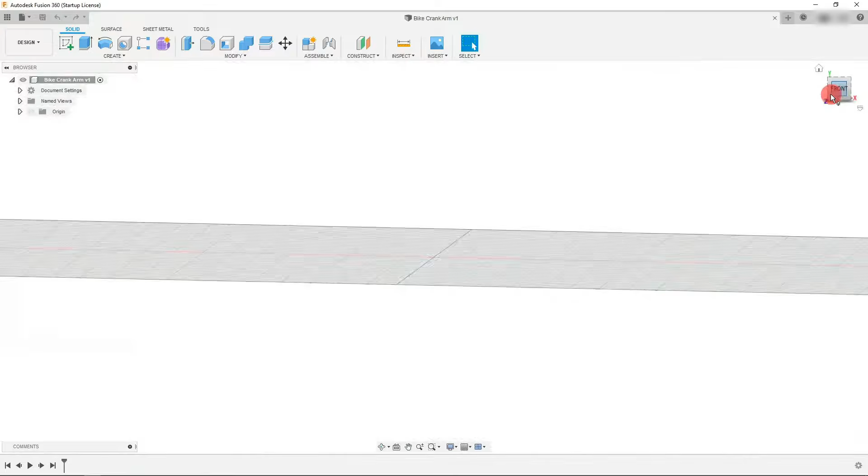Hi, in this tutorial we're going to create a crank arm for a bicycle in Autodesk Fusion 360. So let's get started. The first thing we want to do is come over here to our view cube and click on front. We're now looking at the front of our part. Now let's come over to where it says origin here, and we're going to click on this arrow to reveal our three planes. Now we want to select the XY plane because that lines up with our front view here.

So I'm going to come over here and I'm going to click on Create Sketch. And at this point, let's come down to this drop-down menu, Create Rectangle, and click on Center Rectangle. And from here, I'm going to click on the origin, and I'm going to drag out, and I'm going to place this rectangle here. Now I'm going to right-click and hit OK.

But before we go any further, I want to change my document settings to be millimeters. So I'm going to come over here to document settings and click on this arrow. And where it says units, inches, click on change active units. It's this little button here. And we're going to change this to millimeter.

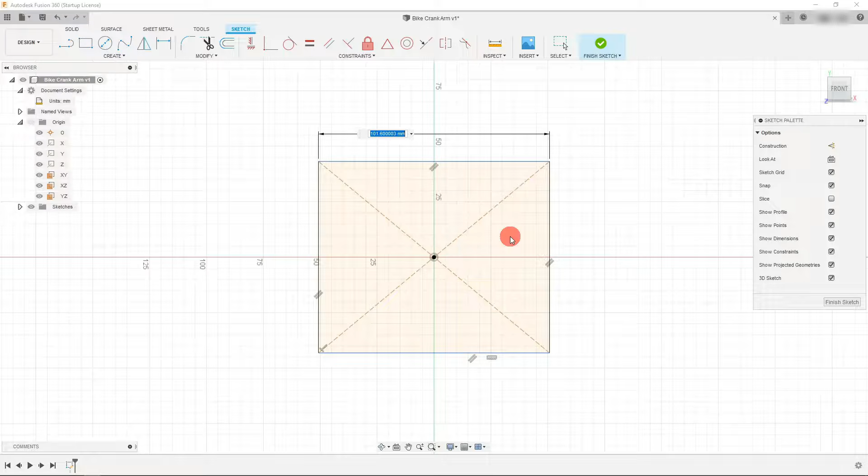And just hit OK. And from here, we can come over here to where it says sketch dimension on this menu. And we're going to set this dimension to be 37 millimeters and hit enter. And we're going to set a dimension on the other leg to be 19 millimeters. And that's our first profile. So after that's been created, you can hit finish sketch.

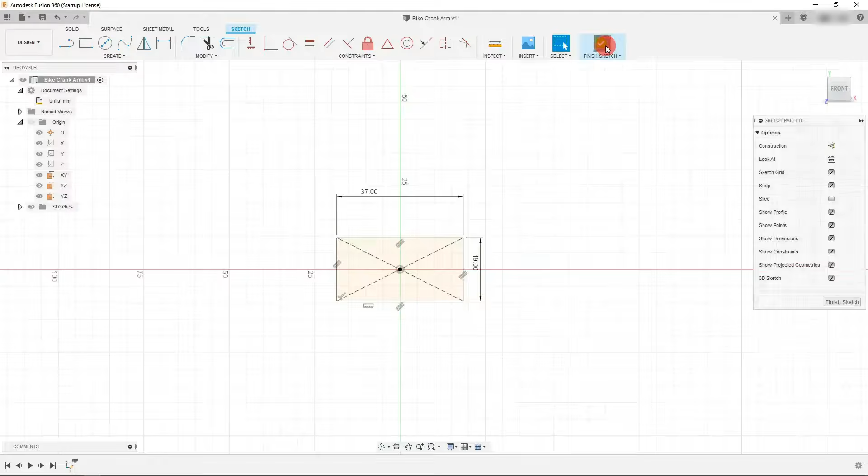And with this being made, let's come over here and click on the corner here. With this being made, we want to create another plane that we can use. So let's click on XY again. This was the plane that we used to make this sketch. I'm going to come over here to construct, click on the drop down, and click on offset plane. And there's this little arrow. Now you can drag this back and forth, or you can just type in a value.

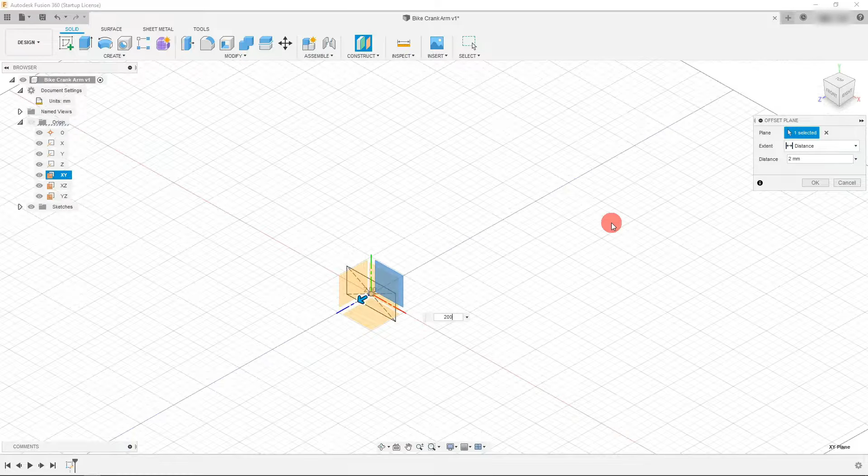So I want my distance to be, let's say, 200, so 200 millimeters. And now if we want to flip the direction, I'm just going to put a negative in front of the 200. You can do that either here in this little window or you can do it in this box, but we're going to hit OK. And we now have a plane which is offset from our original plane.

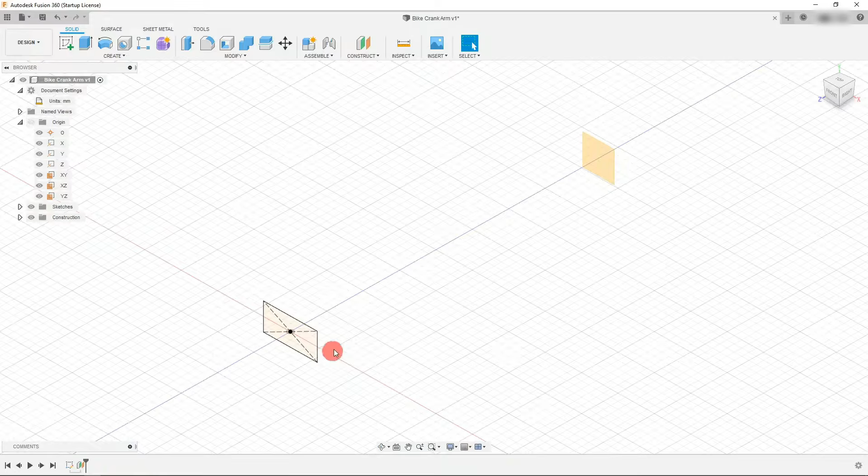And you can create a sketch on a plane. So what we want to do is we want to click on this plane, and we're going to come over here and click on Create Sketch. And like we did before, let's come up to the Create command, and we're going to come down to Rectangle and Center Rectangle. And we're going to place this on this green line here. This is lined up with the origin and with the center point of our original rectangle.

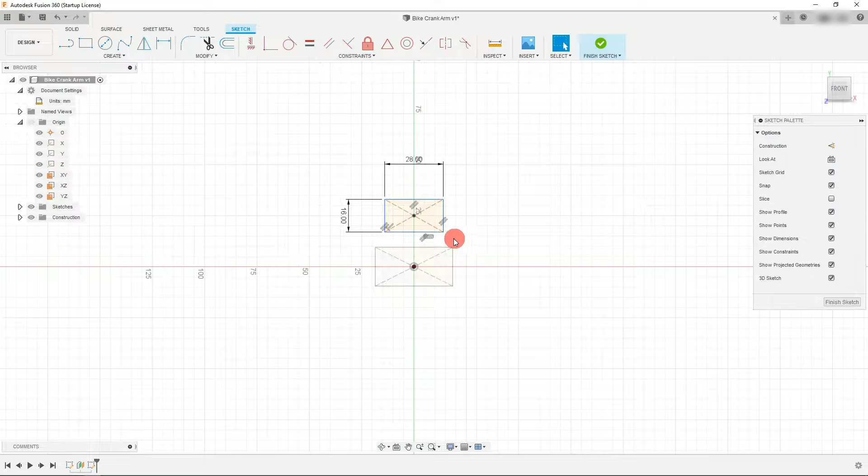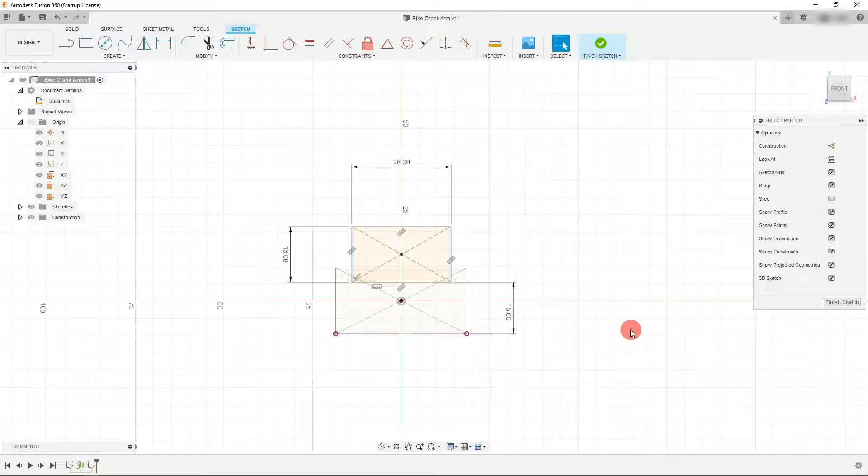So I'm just going to place this at around here, and I'm going to set this dimension to be 28 millimeters. And if you hit tab on your keyboard, it'll automatically go to the next leg. Make that 16 millimeters. And that's what we want. So we want to set a dimension that is 15 millimeters from this bottom leg to this leg here. So make this 15 millimeters. And that's what we want.

And we want to lock the location of this rectangle in place. So you can click on the center of this rectangle and click on the center of this rectangle. And if you click on this constraint right here, that's going to permanently lock them in place so they cannot move. And so from here, we can finish our sketch. And I can come down and click on Orbit here, and I can rotate this around a little bit, and we could get a better look at what we've created. So this is what we want.

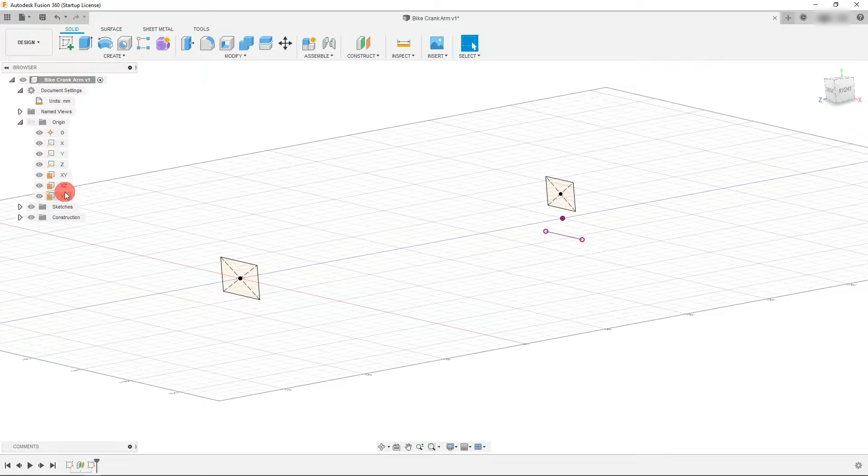And from here, what we want to do is we want to create another sketch. So we're going to start this sketch actually on the YZ plane. And the YZ plane cuts through these rectangles in the other direction. So let's create a sketch.

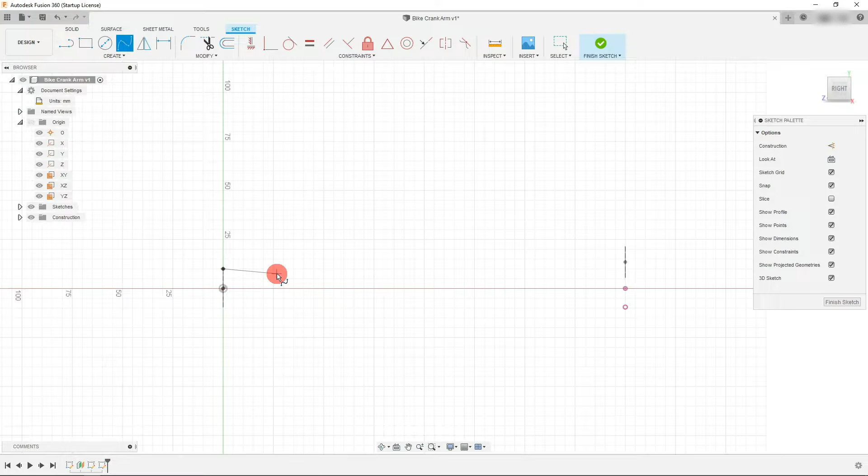And we're going to create a spline. So come over here and click on Fit Point Spline, and we're going to click on the top of the first rectangle, and we're just going to try to feel out the profile that we want. We can always change it later if necessary.

And we're going to place that here and right click OK. And from here we're going to click on line, and we're going to create a line. Oh, you see, actually this isn't correct. This needs to be dragged up to the top.

So if you hover over the top of your rectangle and you click on the point on your spline, you can click on coincident here up in the constraints, and that will constrain them accordingly. Be sure that's right. I'm zooming in and I'm seeing that it didn't do what I wanted to, so just be sure of that. Click on this point, hold down shift, click on this point, and click on coincident to make them coincident.

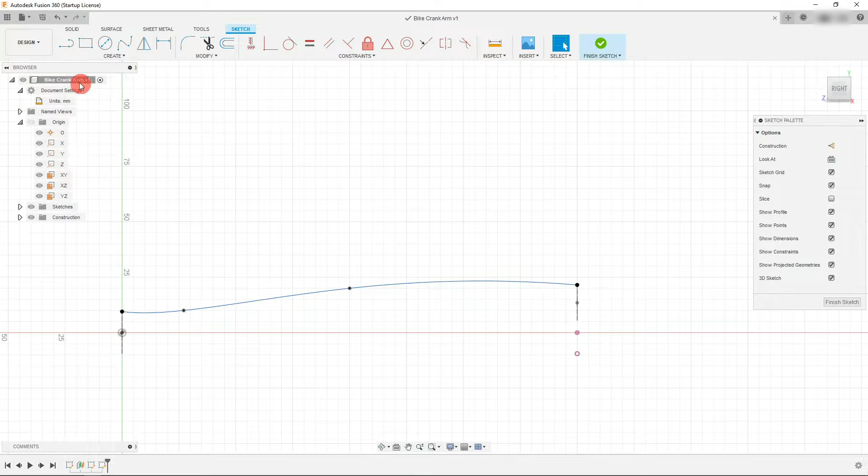And so with that created, I'm just going to save this, and I'm going to click on line, and I'm going to start a line on this point, and I'm going to drag out, and I'm going to create another line on the other point, and I'm going to drag out.

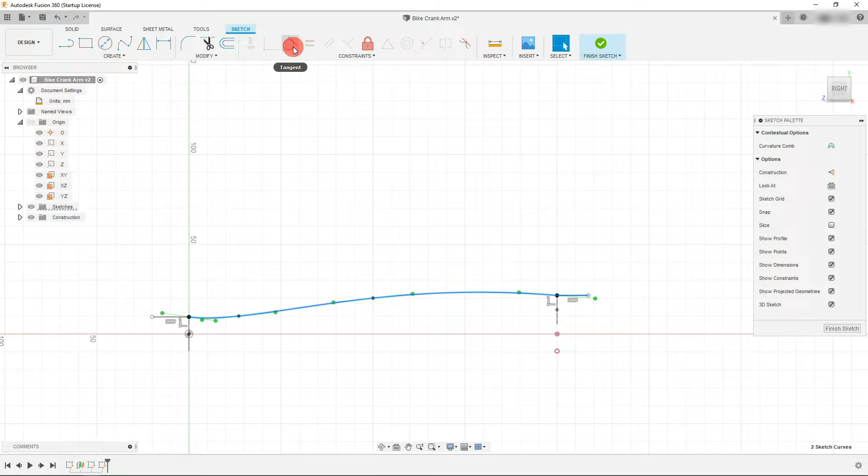And from here, I'm going to click on the spline that we created, and I'm going to hold down shift and click on this line as well. And I'm going to click on this constraint, it's called tangent. When you click on it, it's going to make these lines tangent to each other. So let's do that with this set as well. And there we go, we now have a spline that's tangent to both these lines.

Okay, great, so let's finish our sketch. And now we have our sketch created, which is great. So from here, we want to create a loft. So we're going to come to create, and under create, which will automatically be up - this is the solid tab right here that we're in - so come down to create, and let's come down to our loft.

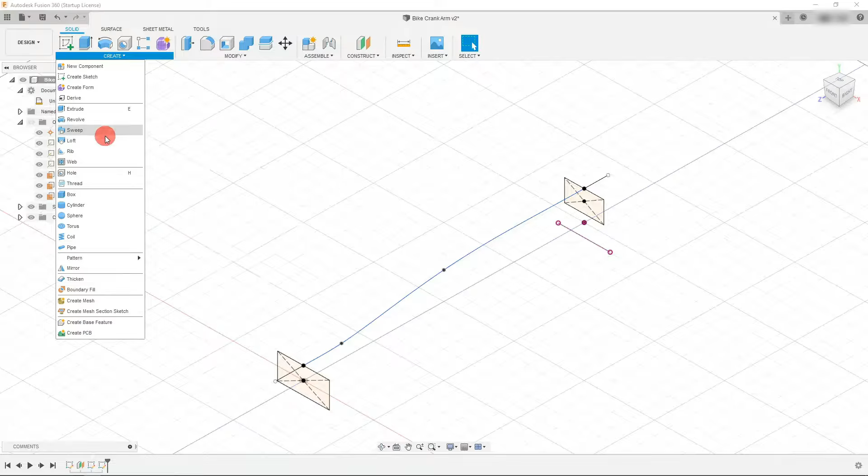So this window is going to pop up on the right side. What you want to do is you want to click on the first rectangle that we made, and then you want to click on the second one, and that's going to draw a profile between them, a sort of solid between them, I should say.

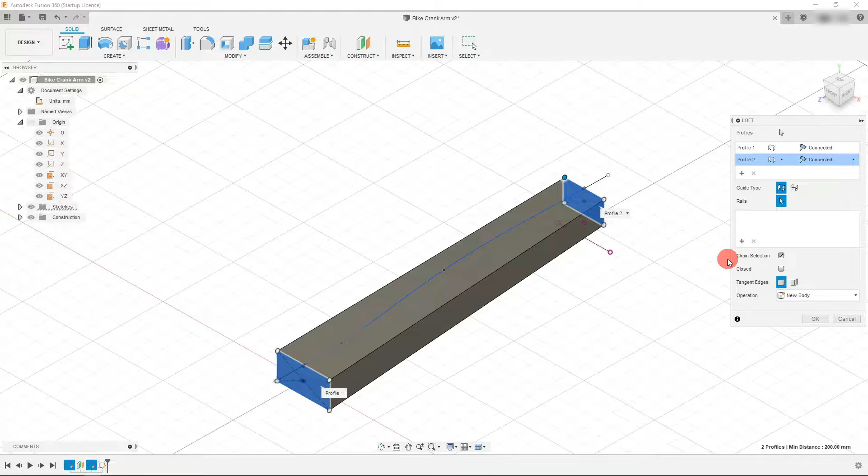And we're going to click on this little cursor right here where it says rails, so click on that. And when you have that selected, click on this profile that we created, the spline that we created. You click on it, and you're going to see that our original profile is now kind of bent to this spline along the path of the spline. So that's what we want.

We're going to hit OK, and we're just going to take a second to inspect what we've created. So that's our shape so far.

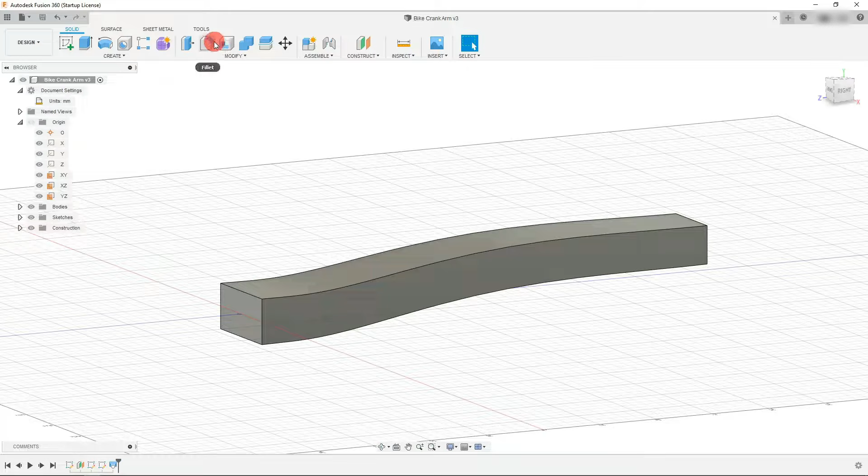With our shape created, we want to add a couple fillets to round out these ends. So let's come up to fillet, and we're going to select this edge and this edge, and we're going to type in 18.1, so 18.1 millimeters, and we're going to hit enter.

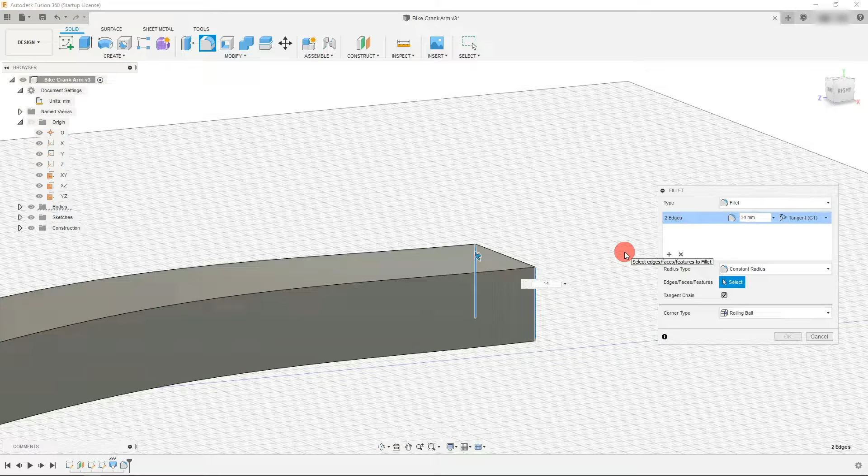And we're going to do the same thing on the other side here. So come up to fillet, and we're going to click on this edge, and we want to make that 14, and we're going to hit OK. And now we've rounded out the ends of our part.

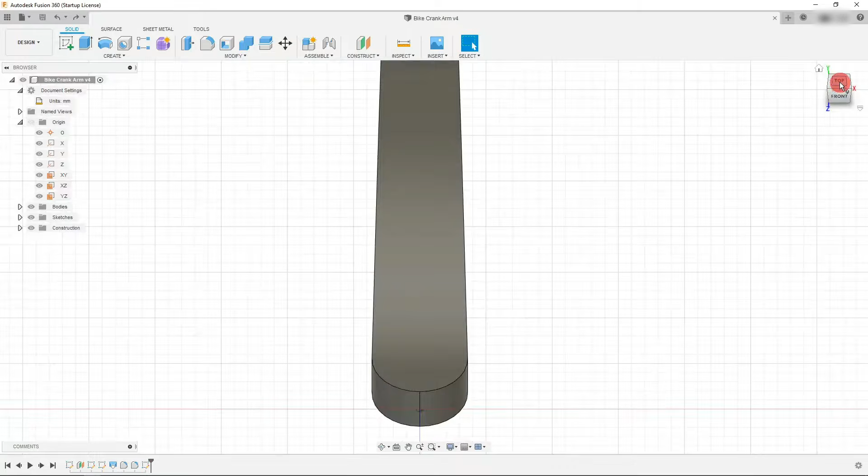And so we now have part of our shape complete. From here, let's come over to our view cube, and we're going to select this edge and then the top to look at the top of our part. And from here, we're going to come over to our planes on the left side, and if we hover over XZ, you're going to see the XZ plane come up.

So we're going to start a sketch on this plane, so come over and click on Create Sketch. And once we've created our sketch, we need to come down to Create, the Create drop down right here, and we're going to come down to where it says Project/Include, and click on Project.

Once you have that selected, what we want to do is select this point right here - it's between the arc and the other arc, so click on that. And we also want to click on this point, and let's select the other two as well. And with those 4 points selected, we're just going to hit OK.

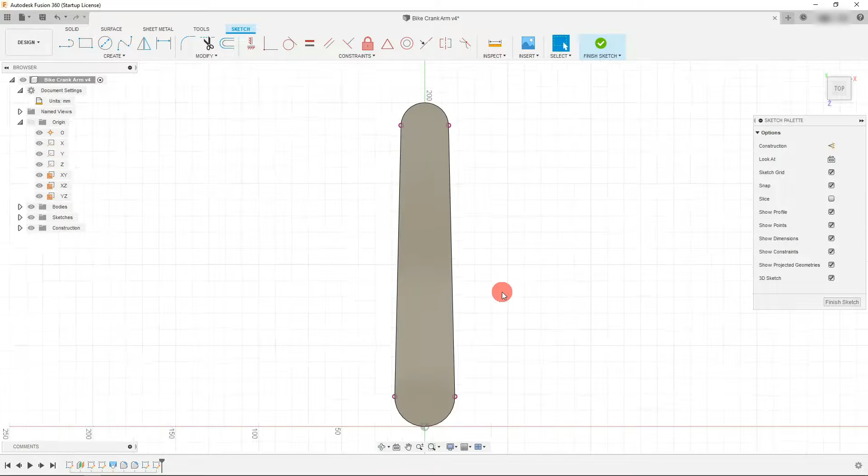And now we have those points selected. So what we can do from here is we can come to Create, and we're going to come down to Arc, and we're going to select the 3-point arc.

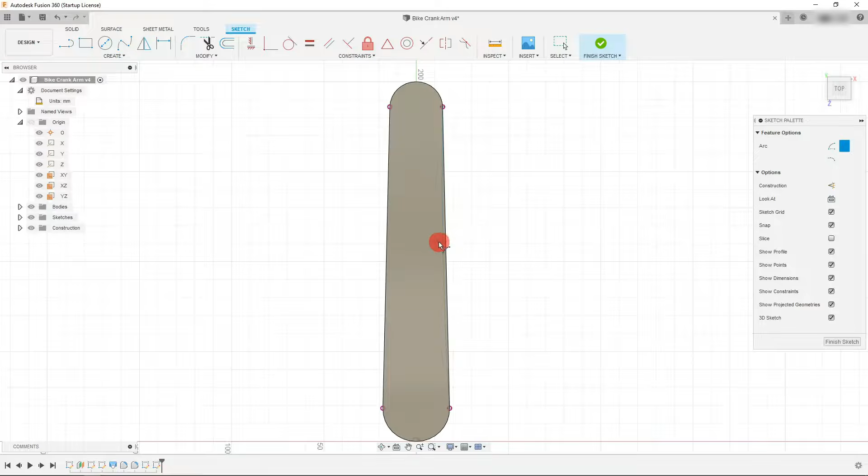And we're going to click on this point and then this point, and you're going to see that we can create an arc pretty much at any angle that we choose. So I'm going to bring it in to about here, and I'm going to click down, and I want to do the same thing on the other side.

And I want to set a dimension, so I'm going to click Sketch Dimension, and I'm going to click on the arc, and a large number is going to come up because this is a large radius of a large circle. So we're just going to hit Enter.

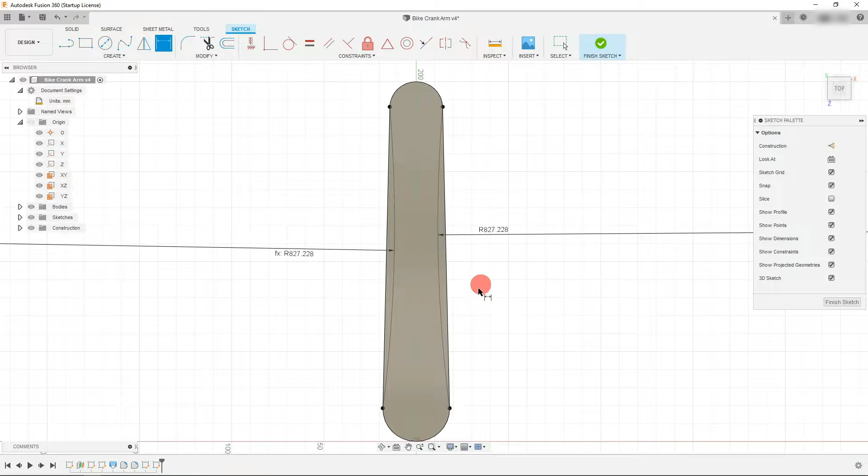And if we click on the other side, once you see that it comes up in blue, just click on the first one, and that's going to link the 2 dimensions, and just hit Enter. And so now these 2 arcs are equal to each other because they're the same dimension.

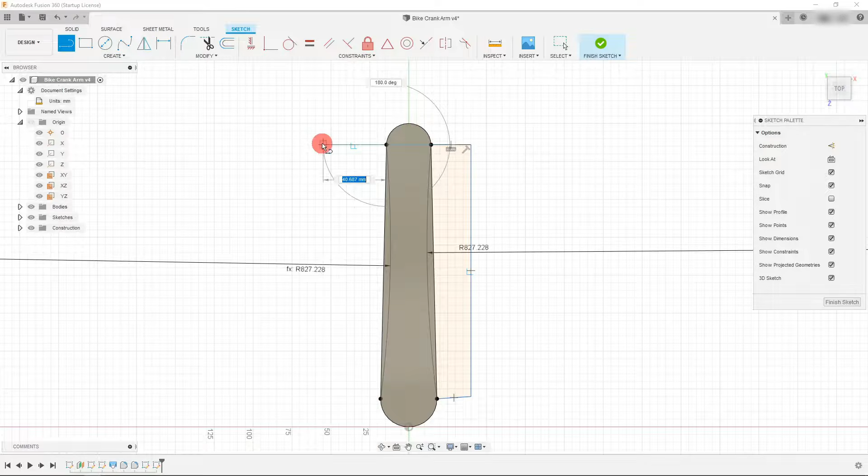And what we want to do is let's come to Line, and let's create a sketch. Now this doesn't need to be dimensioned. I'm just creating a box that closes the profile. So you can come and just create a box to close up this profile.

And with our sketch created, let's come up to Finish Sketch. And now with our sketch finished, let's come over to Extrude.

And we're going to select this profile and this profile. And if I rotate my part a little bit, it's going to make it a little easier to see what we're doing here. So under Operation, let's change this to Cut because we're creating a cut.

And if I take this arrow and drag it upward, you're going to see it's going to cut through our part. But we don't want to just cut in one direction, we want to cut in 2 directions. So let's come to Direction and let's select Symmetric.

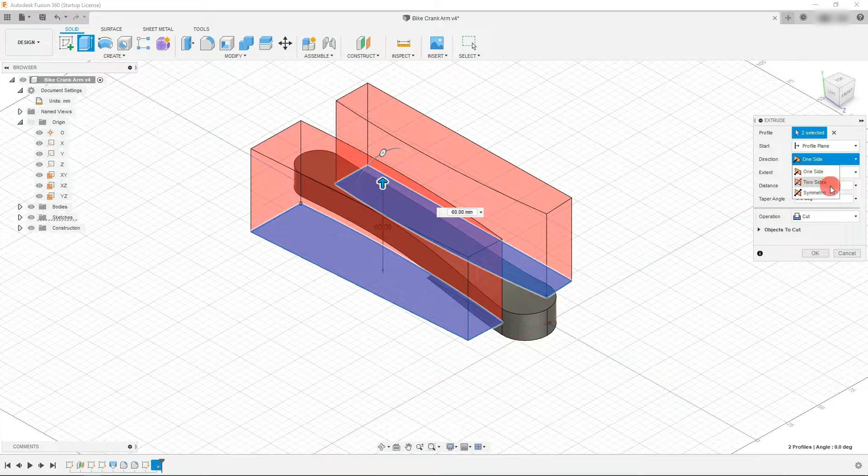Now we're cutting symmetrically the same distance through 2 different directions. So we're going to hit OK.

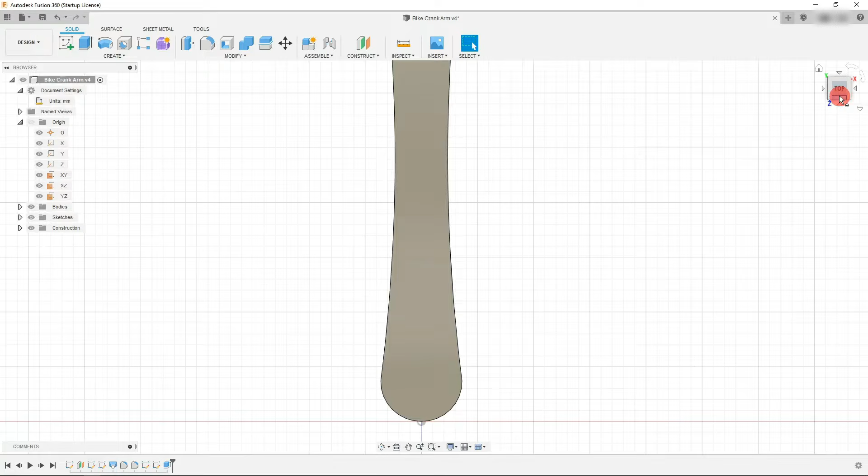And if I look at this from the top now, you're going to see that the cut we've made has changed the top profile. And that's what we want.

So from here, we want to create an extrusion. So we want to create an extrusion here on the bottom. And the way to do that is we're going to come to our plane, here, our XZ plane.

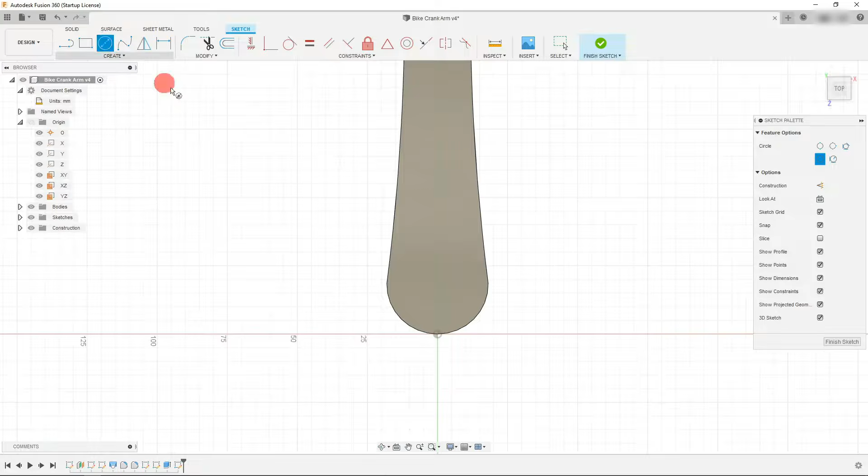And if I start a sketch here on the XZ plane, then I can come and create a center diameter circle, and I can place it where I'd like it to be. Now, it's going to be helpful for me to select this arc.

And with the arc selected, I can come over to Create, and I can come down to Project, and I can project that arc. And with that arc projected, it's going to be a little bit easier for me to find where my center of my circle is. So let me just place my circle kind of randomly for now.

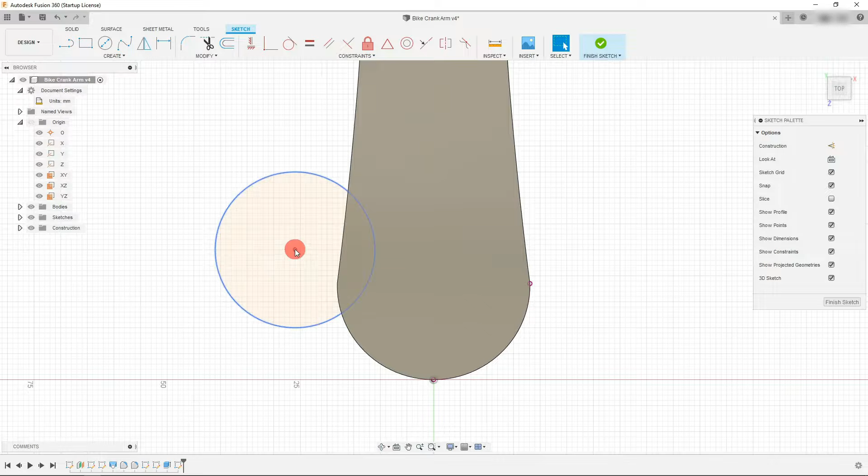And I'm going to try to drag it into place. Now, to help me a little bit more, I can come up to Line and create a line from this point that comes out, and another line that comes to this point here.

And now with these 2 lines, I can determine the center of my circle. So I'm going to click on these 2 lines, select them both, and click on Construction here on the right to make them construction lines. And I can select this point and put them on top of each other with a coincident constraint.

And now I can make my circle whatever size I'd like it to be. So I'm going to make it about this size. So we're just going to set a dimension here, pretty loose. We're going to set it to be about 34.9 millimeters.

And with that created, we're going to finish our sketch. And if we look at this from our view here, we can hit extrude, and if we drag down and change the operation to join, we can create an extrusion that's going to join to the original extrusion.

And we want this to come down about, let's say, 20 millimeters. Now we can always change it, but for now we're just going to leave it at that dimension.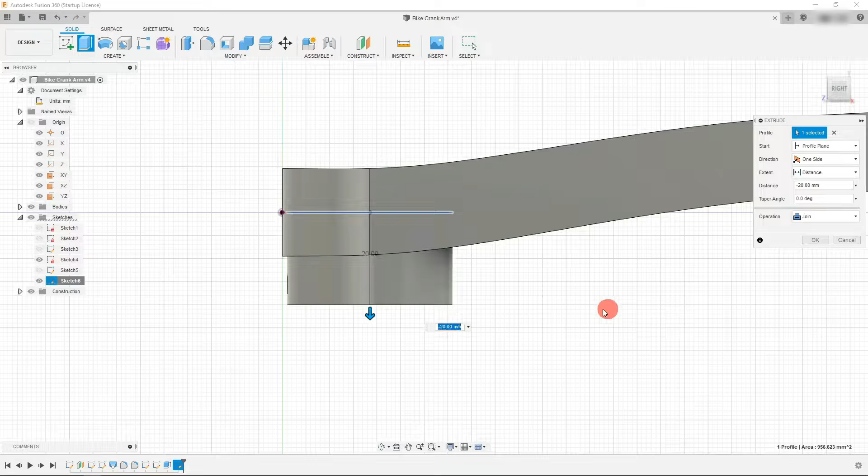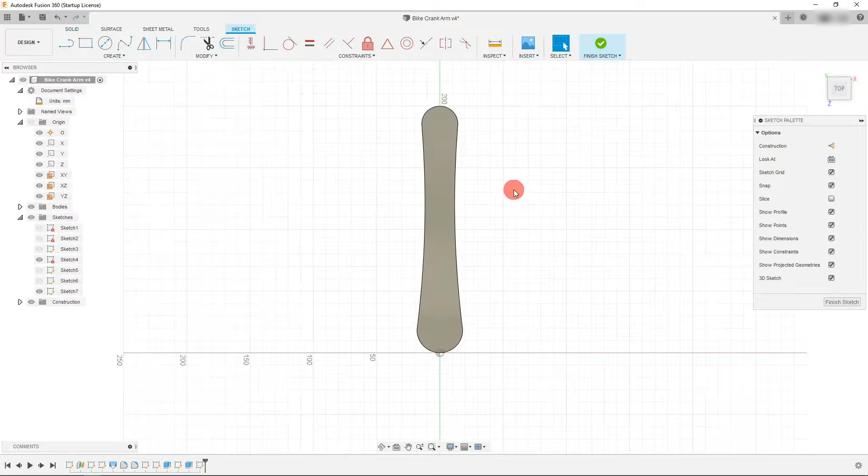And we're going to hit OK. After that's been created, what we want to do from here is create a few holes in our part. So let's create a new sketch. We're going to start on the XZ plane, and I'm going to create a center circle here.

I'm going to create it with the same method we used before. Let me drag out a line. Once I click on these 2 points, the origin and this point right here, I can project them, and then create 2 lines that come out from it. Once I select both of them, I can make them construction. And I can come to center circle, and drag out a center circle that is 25 millimeters.

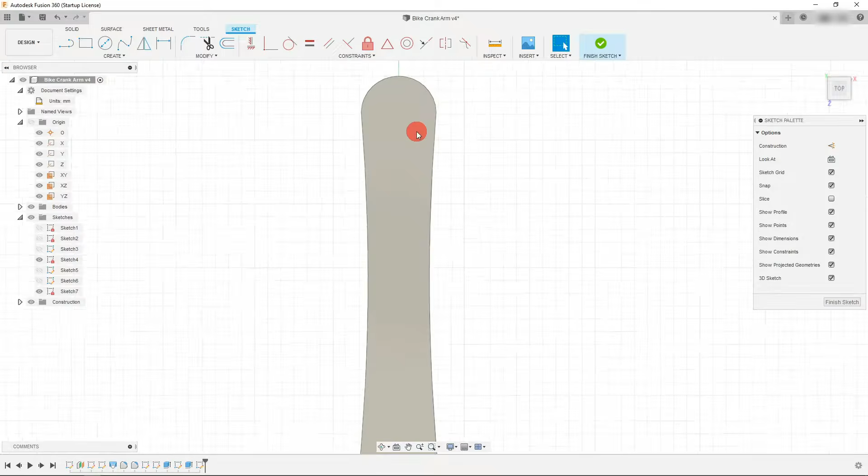That 25 millimeter circle is here at the bottom, but at the other end, we want to create another circle, so we're just going to place it, and we want this to be 20 millimeters. So I'm going to type in 20 millimeters and hit enter. Just like before, we have our same situation.

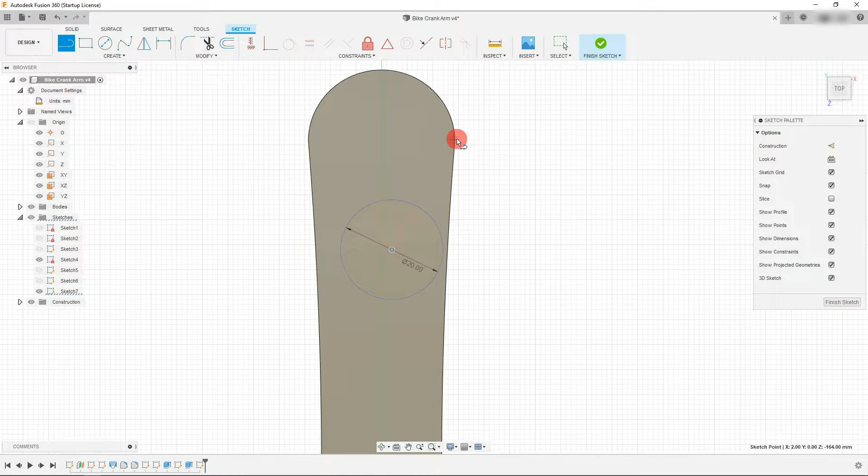We want to drag out a line here to make this a little bit easier. So I'm going to project this point here and this point, and that's going to help me in creating my 2 lines. One line is going to come out to be in line with this point. Once you've created those, same thing, click on both of them with Shift and make them construction, and place the center of your circle right on that point. And you now have your 2 circles, which we're going to use to create our extruded cut.

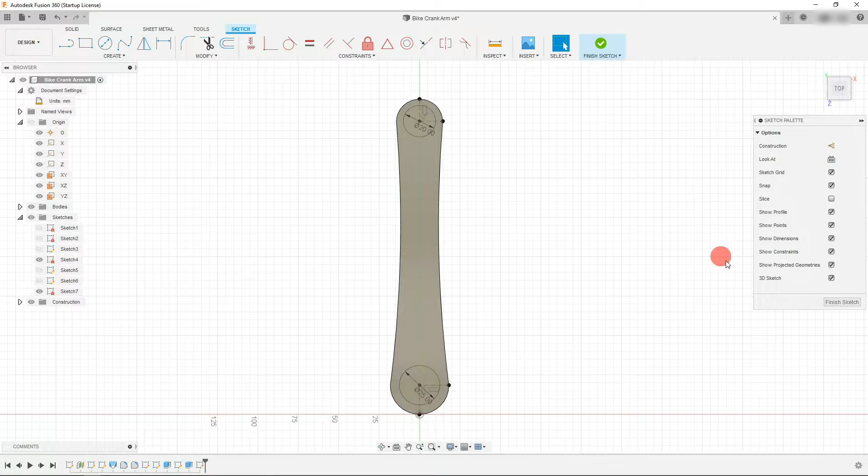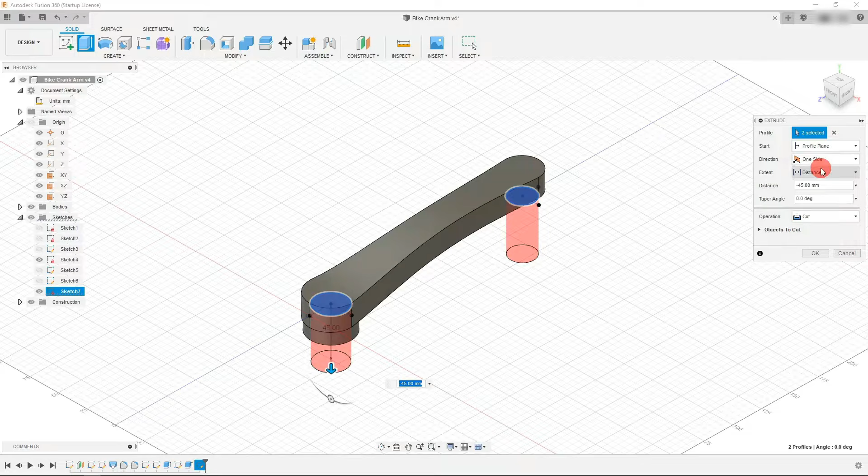Let's finish our sketch, and we're going to come over here to extrude, and click on this circle and this circle right here. With both of these profiles selected, we can now cut down through our part. Now I want to make this the direction symmetric, which will make sure that we cut through the entire part. Make sure your operation is set to cut and just hit OK. And that's what we're left with.

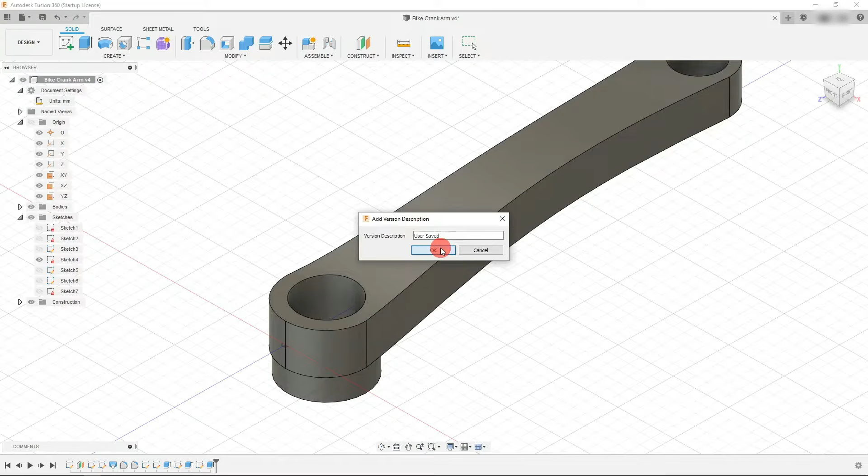From here, what we want to do is create the fitting that's going to go inside here. So what we'd like to do is start a sketch here, and be sure to save every once in a while. We're going to start a sketch here on the YZ plane that's intersecting the part. So start a sketch there.

What we're going to do from here is come up to Tools, and to make this a little bit easier to see, let's click on Section Analysis and click on this plane right here, and that's going to cut our part right in half. Hit OK. We're still in our sketch here, so we can start creating our profile for our revolve of the fitting.

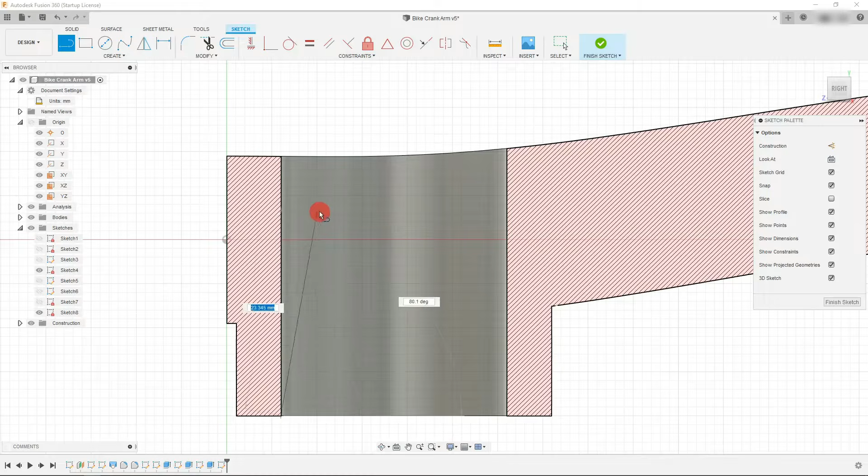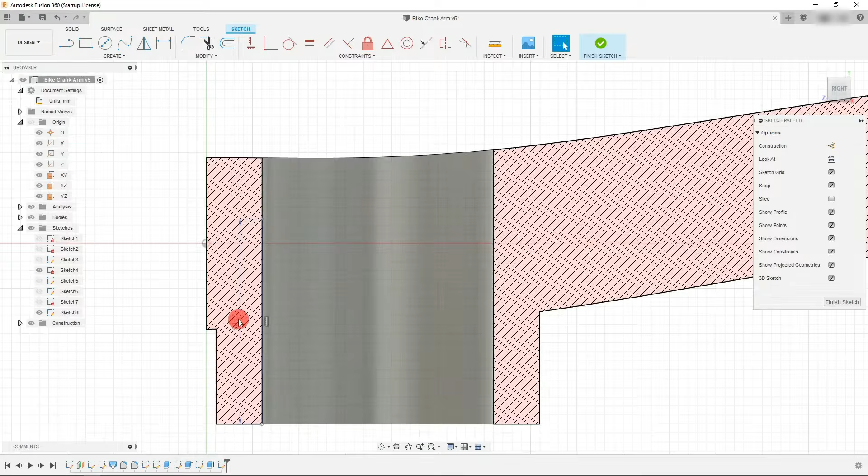Let's create a line. Now the line is going to come from this bottom point, and it's going to come all the way up, let's say to about here, about 22.68 millimeters, and hit enter, and that's your first line. Again, I just placed it right here on this corner point, and I dragged it up, and it's 22.68.

From here, let's create another line. This one's going to be 2 millimeters, so just hit 2 and enter, and let's create yet another one. Click on this point, drag down, and let's set a dimension here between this point and this one. We want this to be 8.2. And we want to set an angle.

So we're going to click on sketch dimension. We're going to click on this first line and the second one, and we're going to make this dimension 3.5. With that set, we want to create yet another line, 1.85 millimeters across.

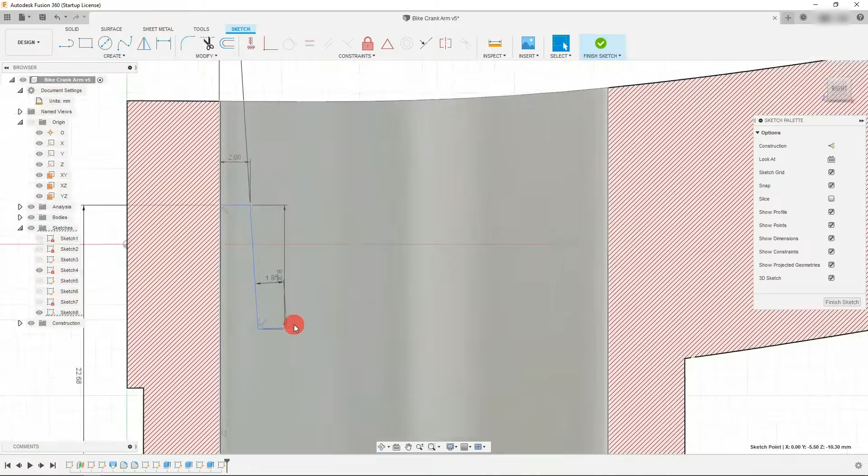And you can see that that's actually not straight across. That's not what we want. You can also see this thing is moving. I need to place it back on this point. If it doesn't place automatically, you may need to select it.

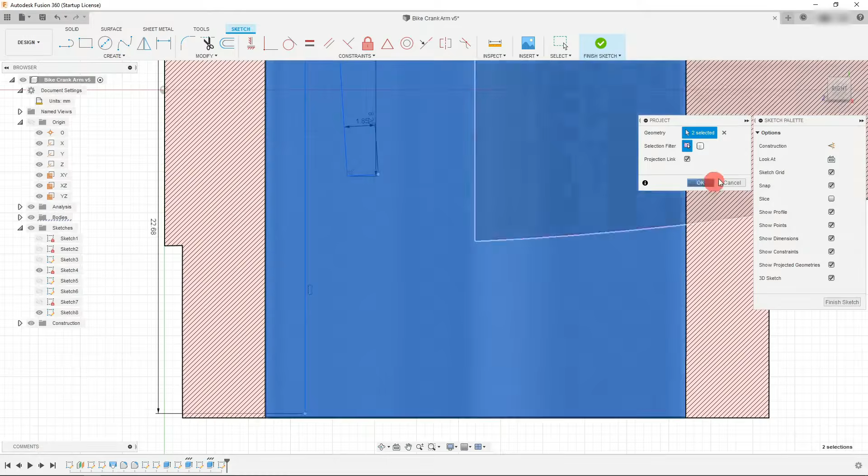So let's come to create, and we're going to do the same thing we did before, project. And I want to project this line, and I want to select this whole face. And now my point has appeared, so I can kind of snap to it here. Okay, great. So let's click on this line because it's being a little bit stubborn. Let's click on it, and let's click on horizontal/vertical.

And you're going to see that that doesn't work because there's some sort of constraint here that's disallowing it. See, this constraint was created automatically. This is a perpendicular constraint, so you can just delete that. And let's try that one more time. Okay, great. Now it works.

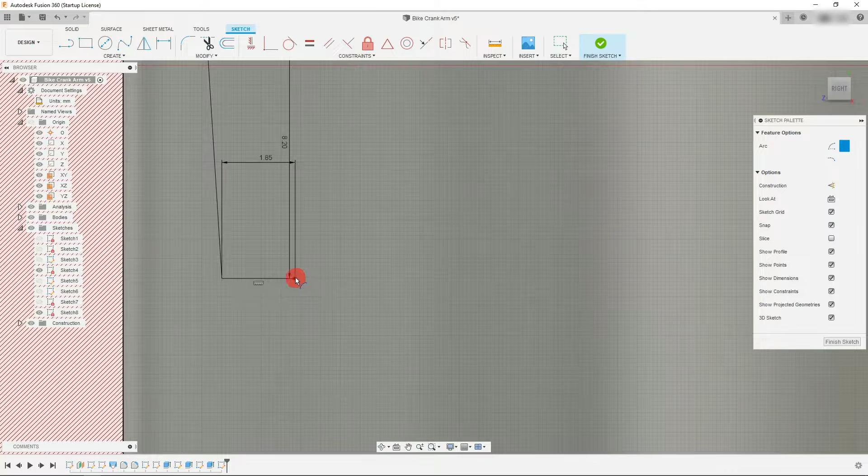Okay, so from here, let's create a 3-point arc. Come to create, and let's go to arc, 3-point arc. Click on this point here. And what we want to do is drag this out and just kind of place it here for now. And let's set a dimension between this end point here and this point. And we want to make this 1.88 millimeters. And that's just a distance.

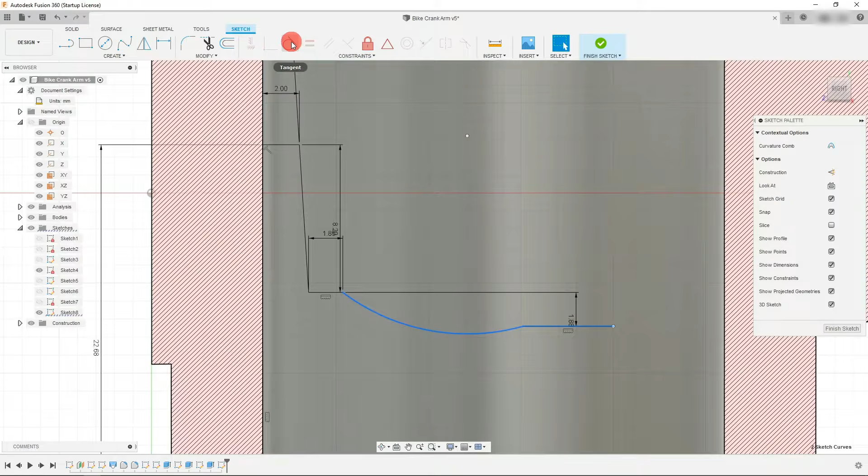And so from here, we also want to kind of set another constraint here. Let's create a line and place it on this point and drag out. And let's select the line and this arc, and let's make them tangent. And so now they're tangent. And with that created, let's set a dimension on this arc. Now I want this arc to be 18.58. And let's click on this original line we created and make it construction.

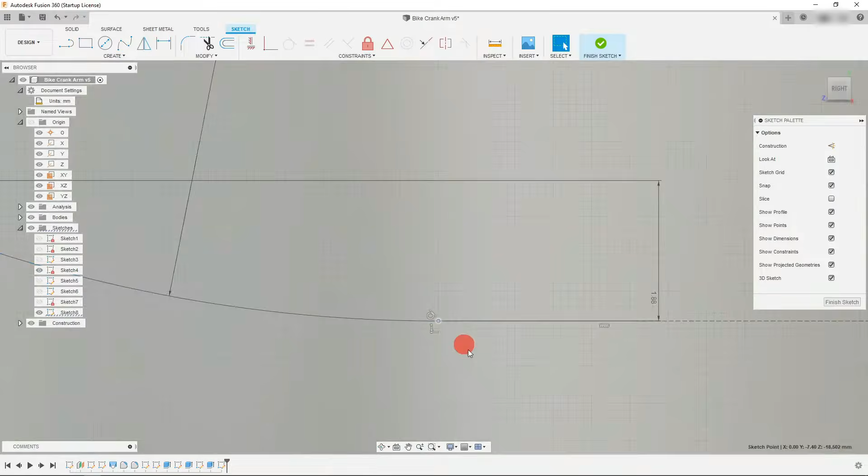Okay, great. So from here, what we want to do is we want to close up our profile. So let's come to line, and let's click on our point where the arc ends, if we can find it; it may be a little bit hard to see. There's the point. So let's create a line, click on the point, and let's come down and come across to kind of finish this off. And we have our profile created. Now from here we can finish our sketch.

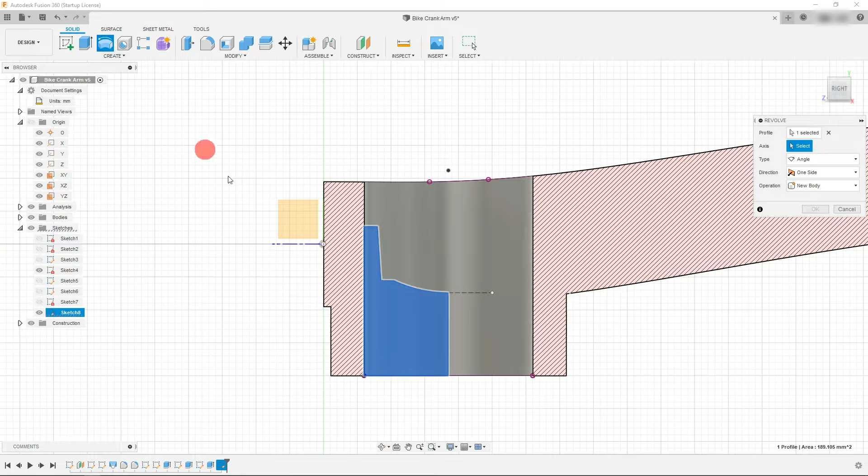And let's come to solid and revolve. So our profile is automatically selected. Now we're going to click on the axis here, which is this line. And that's going to revolve our fitting. So we want to create a new body, and that's automatically selected. We don't want to join, we want to create a new body. So let's hit OK.

And if we look at this from another angle here, if I come back to tools and turn off my section analysis, if I come to my analysis here on the left hand side and right click on this and just click delete, now that's going to get rid of our section analysis. We can kind of see the shape that we have here. So that's what we want. And from here, we want to create another cut.

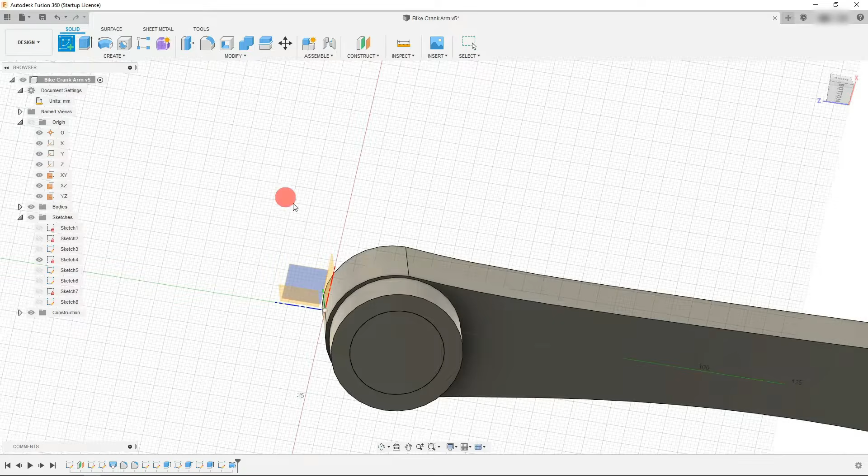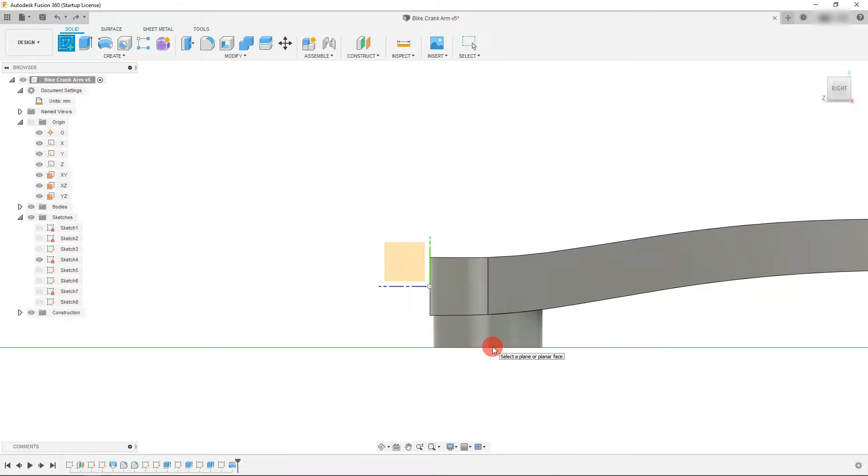So let me exit out of this, and I'm going to create a sketch here. So I'm going to click on this face, and let me come to solid, and I'm going to create a sketch. Sorry about that. I'm just going to create a sketch right on this face. And now that I'm creating a sketch on this face, I had to select the face. That was the issue. So with this face selected, after you create a sketch on this face, what you want to do next is

create a center rectangle. So come to rectangle, center rectangle, and let's create a rectangle here. We want it to be 13.33, and that's in both directions, 13.33. And when you hit enter, it'll be created for you. You can kind of rotate this around a little bit. We want to place this right in the center here.

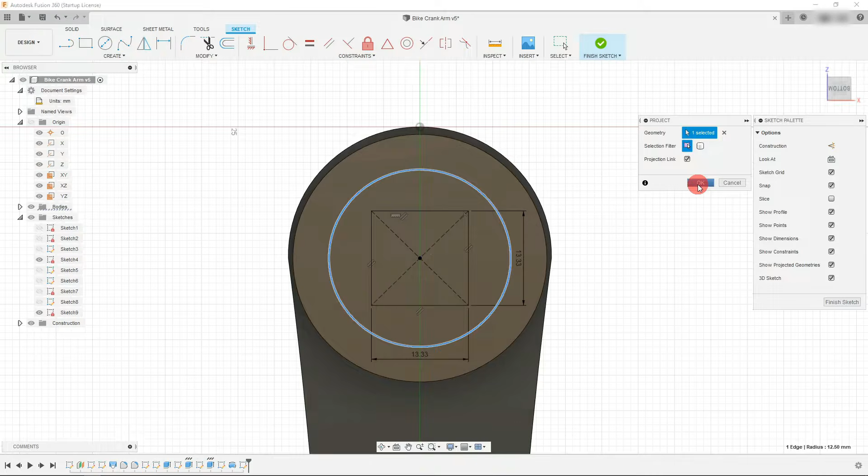So I'm going to show you a little trick. You can click on the circle and just click P on the keyboard. And if you select a circle and hit OK, the center of the circle will automatically come up. And that's what you want, because you want to be able to place the center of the rectangle on the center of the circle.

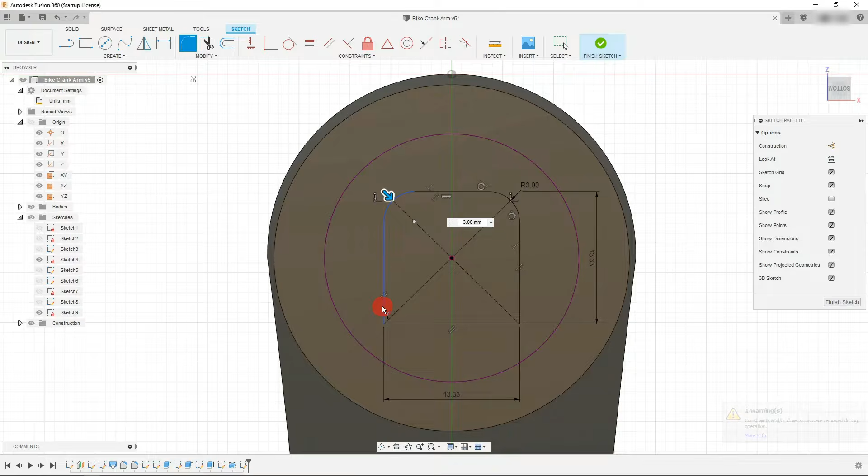Now with that created, let's come up to Fillet. And we're going to click on these lines to create our fillets. So just click on this leg and this leg, and let's type in 3, and that's going to make it 3 millimeters.

So if you're at 13.33 on both legs and your radius is 3.0, then with this sketch finished, what we're going to do is finish our sketch and then come to Solid, and we're going to click on Extrude, and let's select the profile that we created. And what we want to do is extrude through our part, and we want to set our distance to be long enough that we're cutting through our whole part. As long as it's long enough, it should be fine.

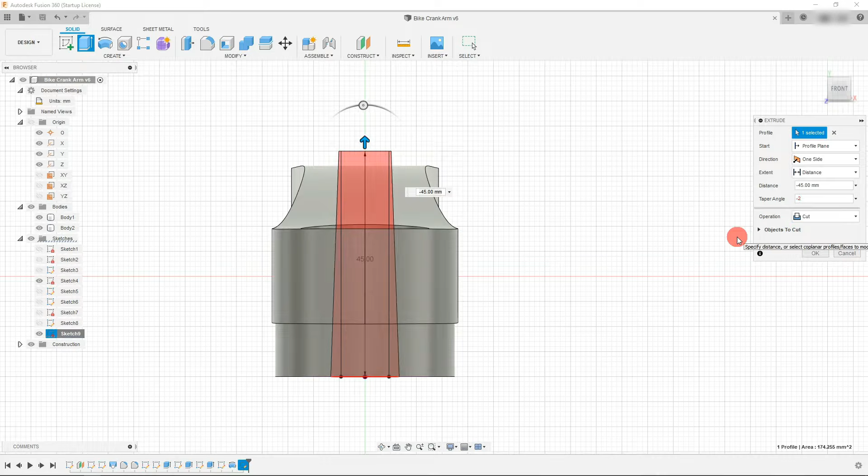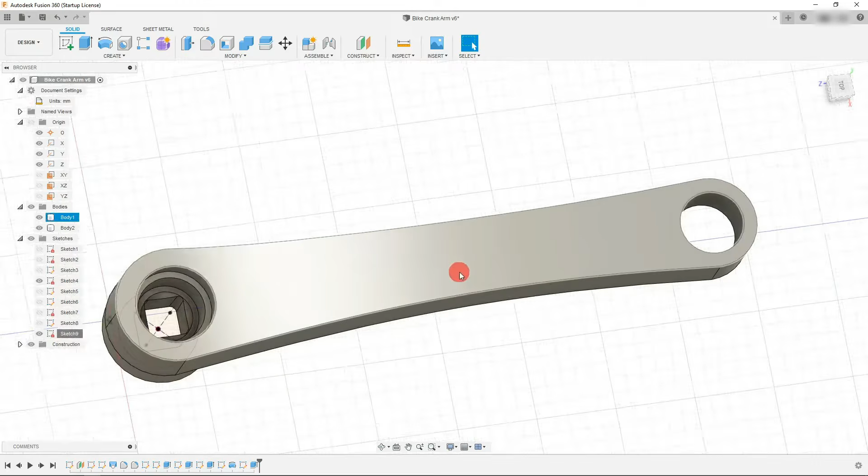And we want our taper angle to be -2 degrees, and you're going to see that it tapers inward. And as long as we have cut selected, we can hit OK. And if we look at this now from the top here, we can see that we've cut through our arm. So that's what we want. Now the next thing we need to do is the same thing for the other side. So I'm going to start a new sketch, and that new sketch is going to happen on the YZ plane.

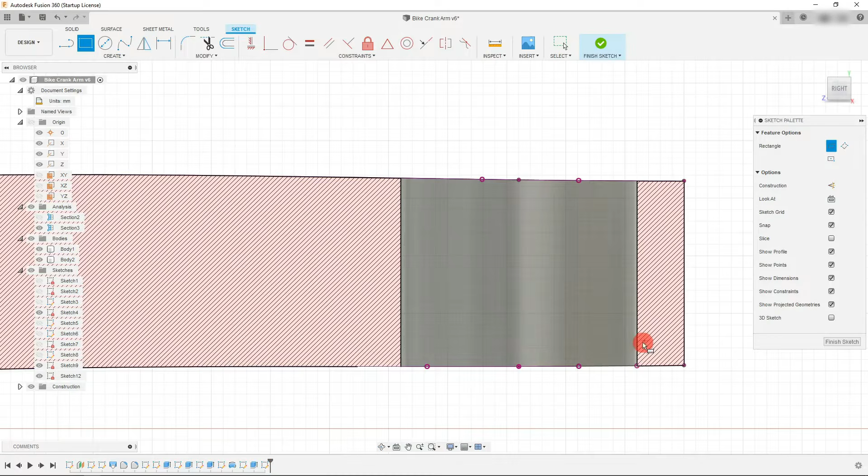And let's come to Tools, and let's click on Section Analysis. And we want to select the plane that we're currently working on, the YZ plane. And let's hit OK. After projecting this face right here, what I want to do next is come to my 2-point rectangle right here, and I want to drag it out and place it along this line. And I'm going to set a dimension here between the line and this point, and I'd like this to be 2 millimeters. Now I also want to create a dimension between this point and this line, and this one is going to measure up to be 2.4.

And after having created those two dimensions, I can now create a final dimension for the diameter here. So the way that I'm going to do that is I'm going to create a line between this line and this line. And I'm also going to place another line perpendicular to it. And if I select this point and this line, I can come up here and click on this midpoint constraint. And that's going to set it to be the midpoint.

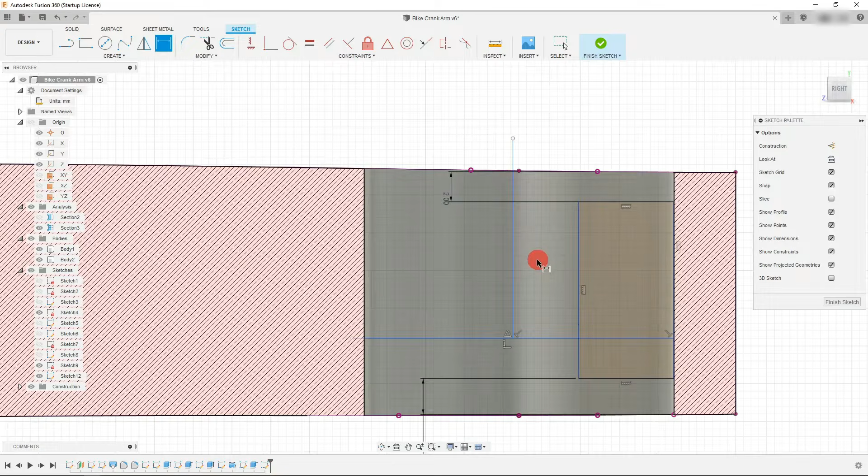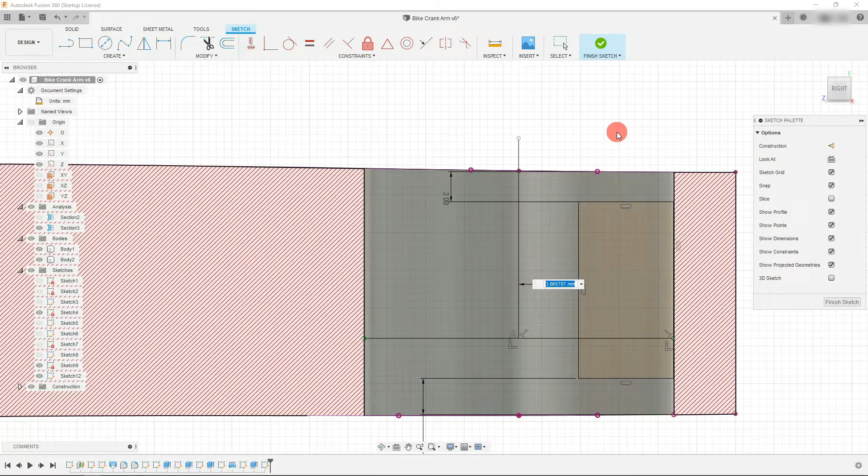Now, with that being done, I can set a dimension. Well, first what I'd like to do is fix this point. I'm just going to fix this point, and I want to move this here and fix this point just so it doesn't move. And now I can set a dimension between this line and the inside here. And I want this to be 12.86, and that's going to be divided by 2 because this is the radius. And that's about what we want it to look like.

So what we want to do is add a couple little fillets here. I'm just going to select this edge and this edge, and I'm going to make this 0.5 millimeter, and hit OK. And I'm just going to hit finish. And then from here, as we did before, we want to do a revolve. So we're going to select this profile here. And for the axis, we're going to select this line. And that's going to revolve it accordingly.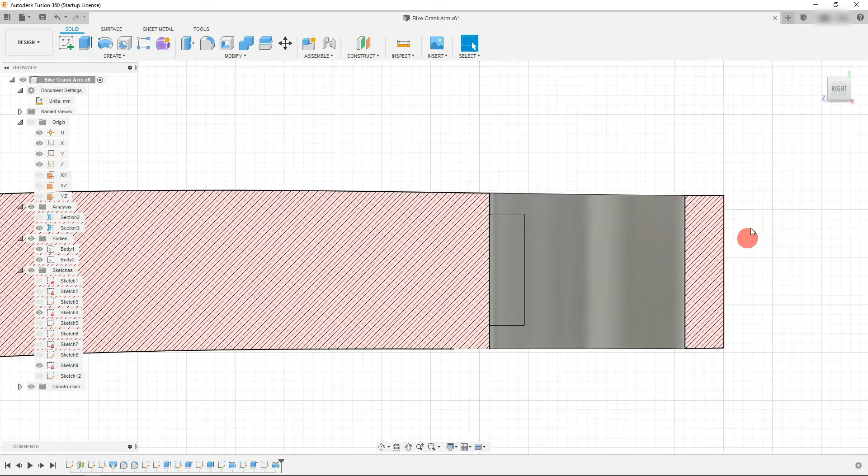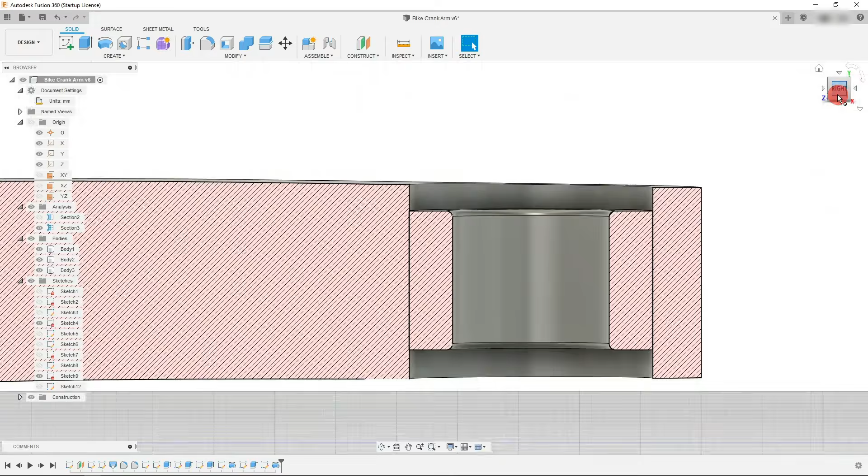And so I think we selected the wrong thing here. That's the risk of not paying attention. So operation, I want this to be a new body. And there we go. So that's going to be a new body, and that's going to work out just the way we want it to. So we're going to exit the section analysis. To do that, we're just going to right click on our section analysis here and just hit show/hide.

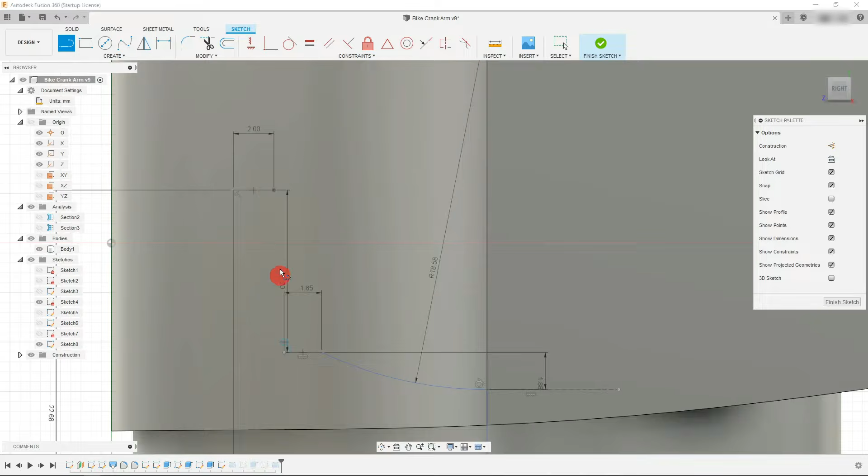Now what we want to do from here is create a small modification to one of our sketches. So let's right click on this sketch that we created for our revolve, and let's edit the sketch. And we're going to delete this leg right here. So delete that. And we're going to create a line that comes from the bottommost point here of this leg, and it's going to just come straight up, and then across. And we're going to connect back to our original sketch.

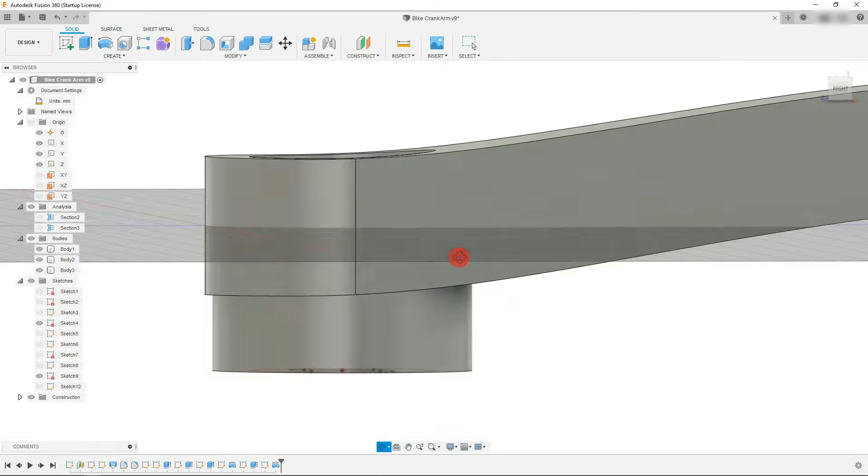And when you finish the sketch, everything should update accordingly as long as all the sketches are all connected. At this point, we can add the threads to our crank arm. So let's orbit this a little bit so we can see it a little bit better. And we're going to come up to Create. And under Create, we're going to come to Thread. And for this example, we're going to click on this face. And we're going to set this to be 0.5625.

So we need to change from ISO metric to ANSI unified screw threads. I'm going to choose 0.5625 and I'm going to make this a 9/16-20. So 20 threads per inch. And this is going to be a left hand for the direction. And we're going to click on this little box that says modeled.

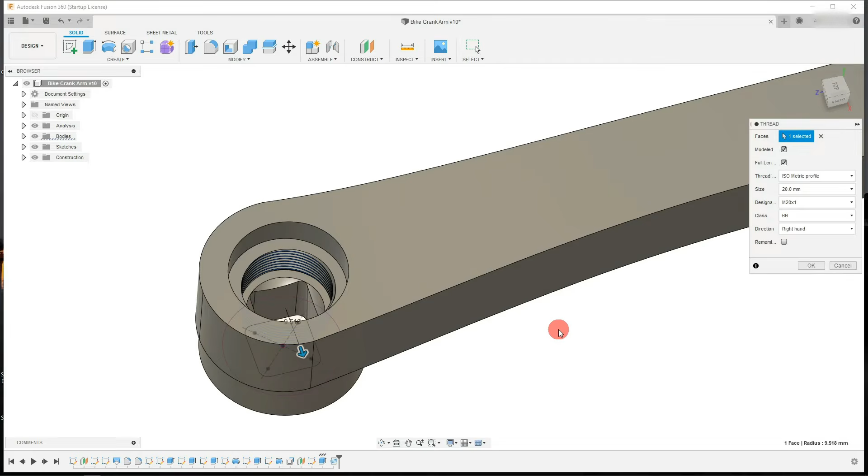And we're going to do a similar thing to the other side. So I'm going to come down to thread. And I'm going to click on this face. And for this example, I'm going to make it an M20. And I'm also going to make sure to model in the threads. And I'm going to hit OK.

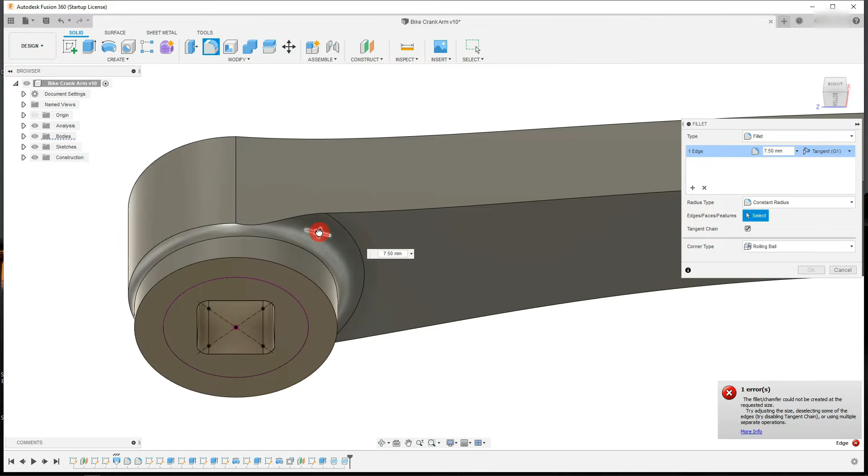And from here, what we'd like to do is add a couple fillets to our part. So one place where we need fillets is here on the underside. So let's come to fillet and let's click on this edge right here. And we're going to drag out. And if we drag out too much, we get an error message because our fillet is too large and it cannot be modeled at that size. But at this size, at about 6 millimeters, that's going to work for us. So we're going to set it to be 6 millimeters for now.

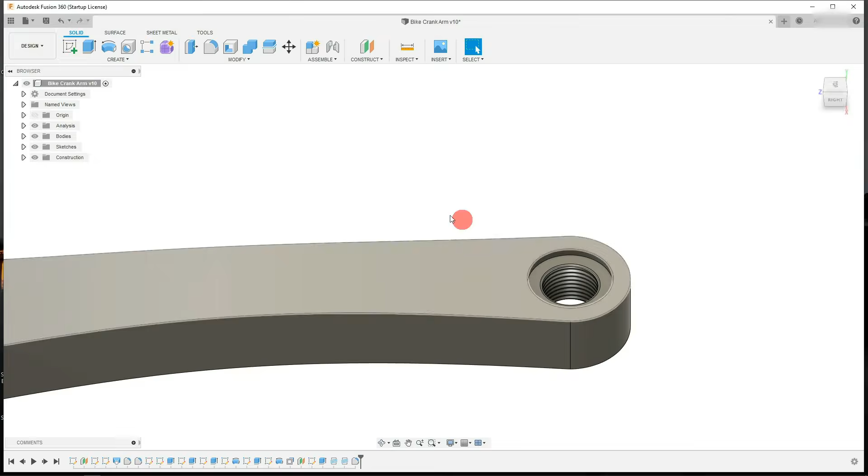And we also need some extra fillets for these other edges. So let's come back to fillet. And let's select this edge and the other edges. And we're going to draw in. And we see that we're getting an error message. And that's likely because this edge right here is a sharp edge. So what we may need to do is create fillets on that first. So let's try that and see if that changes anything.

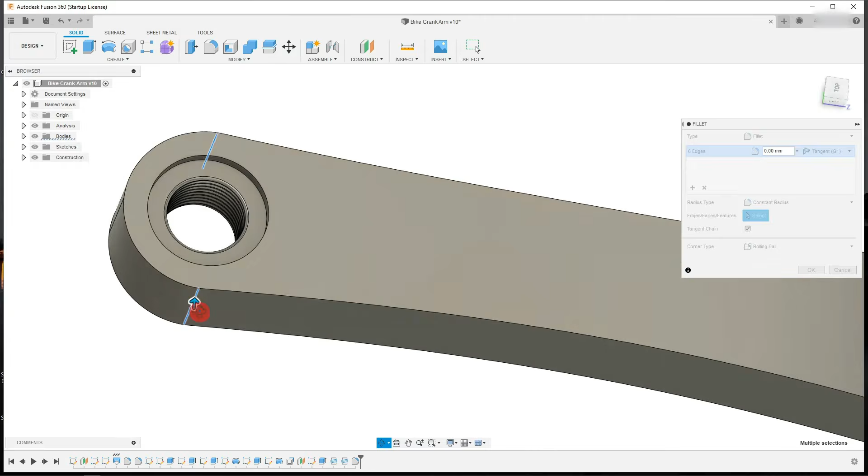I'm going to select these two edges and I'm going to rotate around and select the other two as well. And with these four selected, I can now drag in a little bit my arrow. So I can push this in a few millimeters. Now we get an error message if we go overboard and make it too large. You can also destroy your part, as you can see, but we just want to go with small increments. So I'm going to type in 1 millimeter. And that seems to be working, so I'm going to hit OK.

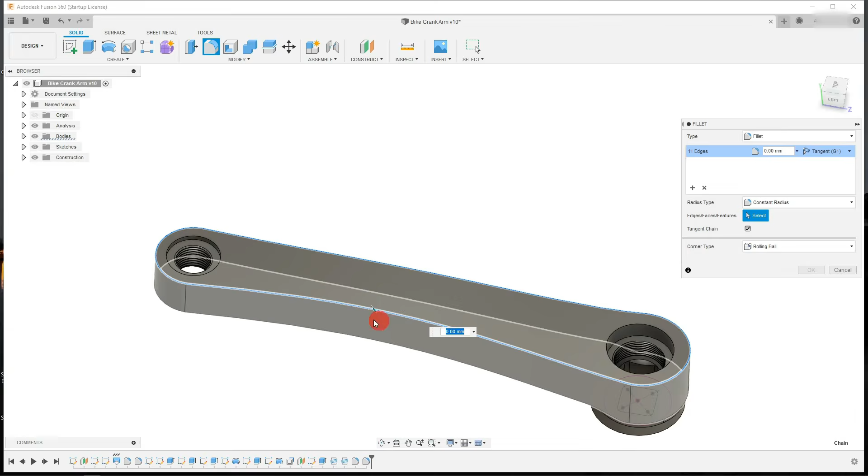And once that is created, we can come back to our fillet and create a couple more fillets. So I want to create a fillet here at the top, and I'm gonna just type in a value, 2 millimeters, and just see what that looks like. And we can go more, we can try 4, and that's gonna be about good. So we're gonna leave it at that for the top, and we want to do the bottom as well.

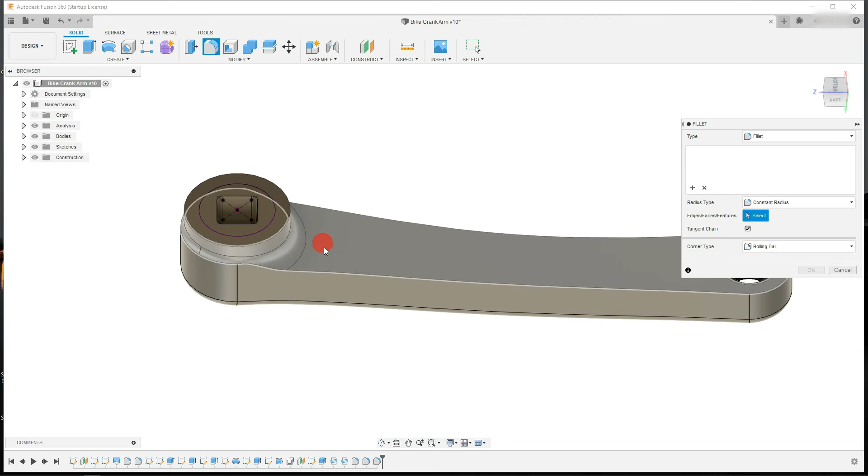So let's come back to fillet and let's click on this bottom fillet. And we're going to see how much we can go without getting an error message as we did the last time. So I'm going to make this 4 millimeters, and that looks just about good. And those are the fillets on our crank arm.

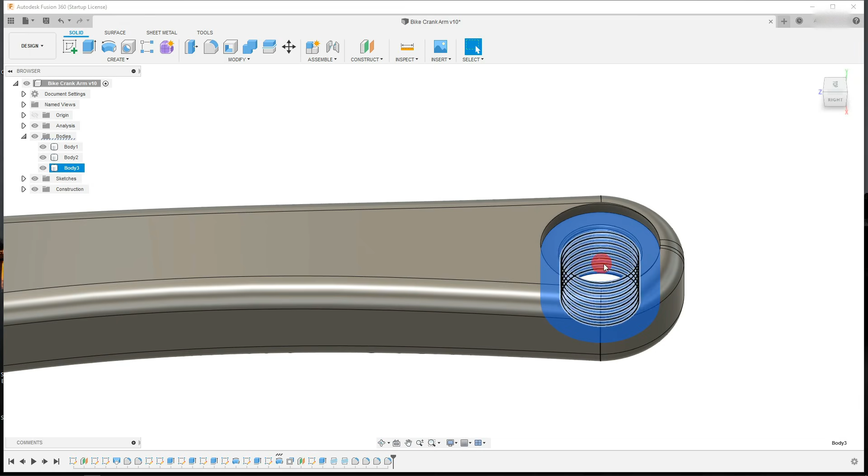Now, if you'd like, you can also change the color of the parts. So just as an example, we created this fitting in here. What I can do is I can come down to where it says bodies, and I can choose this body, body number 3, and I can change the color. So I can right click and go to appearance, and the appearance tab is going to come up here on the right side,

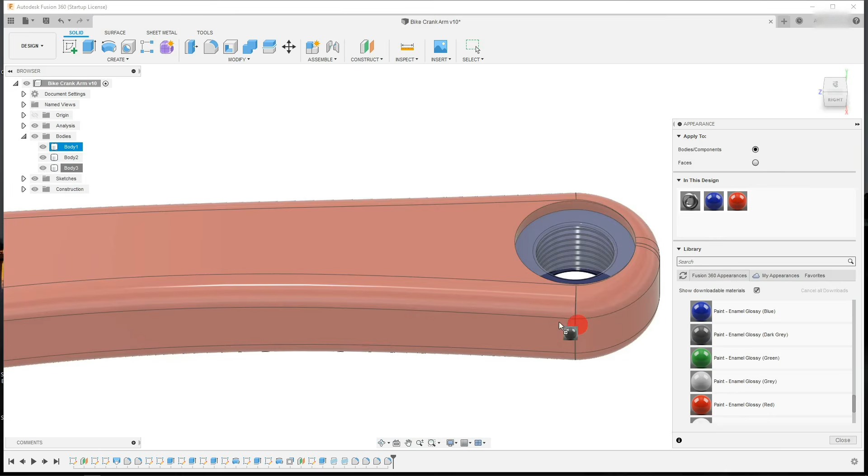and I can make this an enamel that's glossy, and I can also change the color of the crank arm itself, or I can make that black and then have this be red. So that's a really easy way to distinguish a body from another body, and it also gives it a really cool look. So that's our crank arm.